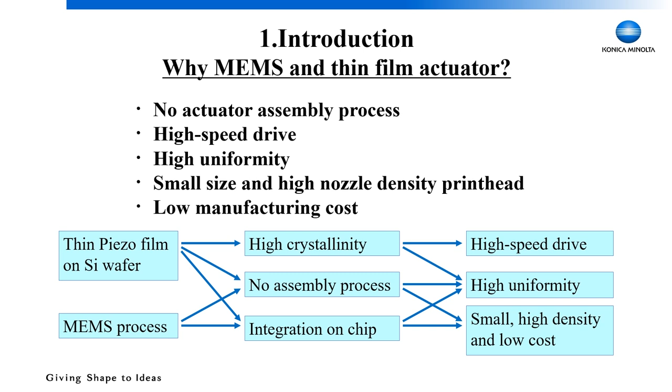Small size means we have more space in the actuator plate, so we can add some new functions like ink circulation. This is the purpose of this work.

High quality inkjet printer requires jetting properties like: high jetting frequency around 100 kHz, small droplet size around 2 picoliter, and the ability to use high viscosity ink around 10 millipascal sec. We tried to establish a method to design thin film MEMS heads by building a simulation model and manufacturing prototype thin film MEMS heads and verifying the observed properties and calculated ones.

Okay, next part is simulation method. In this section, I'd like to explain our simulation model. Piezoelectric inkjet head is generally divided into two parts: actuator part and ink flow channel part. These parts are combined with each other when the printhead ejects a droplet. Then coupled analysis is needed.

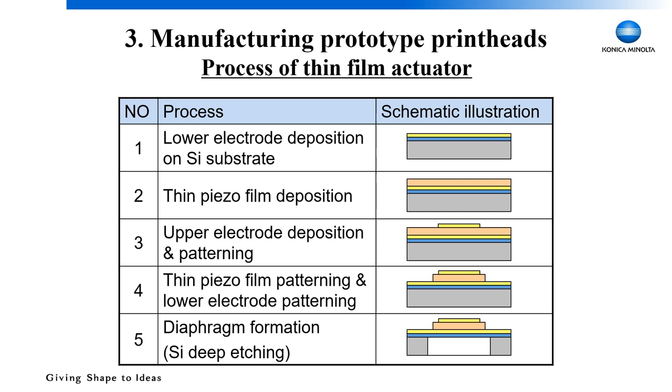This is the fundamental waveform we applied for our experiment. We applied pull push drive. At first, application of voltage V1 contracts and deforms the actuator. And next part pulls the actuator and ink is introduced. And then final part pushes the actuator and ink is ejected from the nozzle.

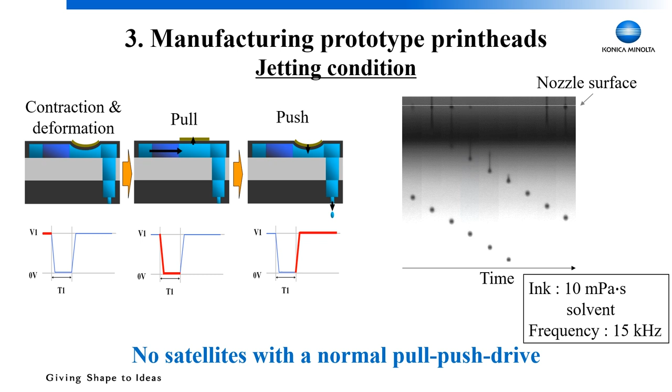Next, to investigate the specific actuator properties, we observed the actuator oscillation properties by laser Doppler vibrometer. This is the observation model, and we use glass plate as top cover of the prototype head, and that enabled us to observe the actuator oscillation during the printhead jetting the droplet.

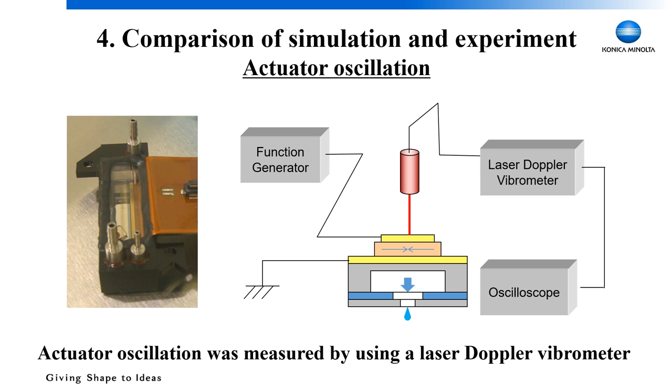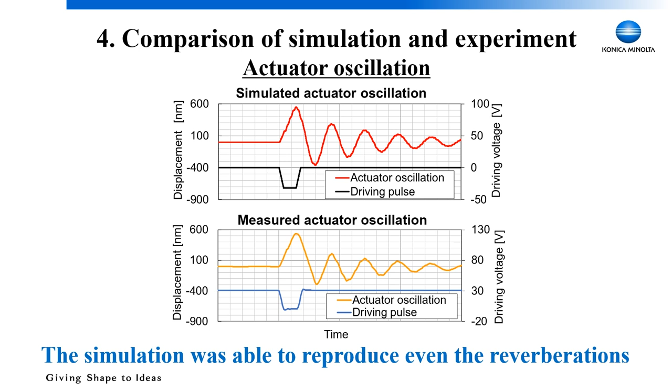Then we used this measurement to optimize the driving waveform. These reverberations interrupt the next jetting pulse when we use the printhead with high frequency. For example, if we use frequency higher than 50 kHz, the next jetting pulse will come around this timing. Then we need to eliminate the reverberations.

We applied cancel pulse to eliminate the reverberation in this timing. We optimized the cancel pulse shape and timing to eliminate the reverberation by observing the actuator oscillation directly.

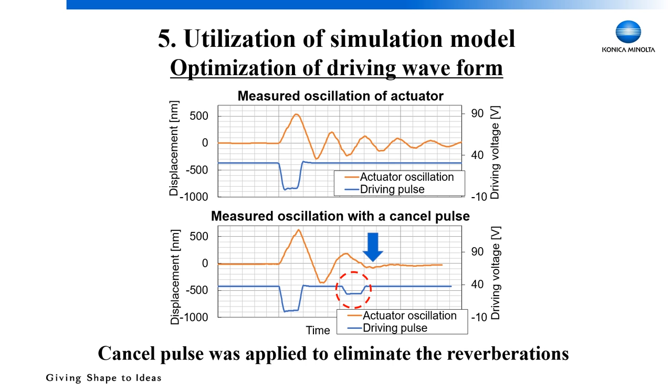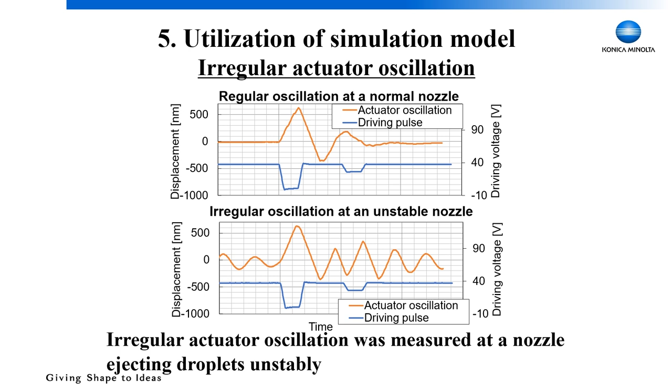The oscillation shape itself wasn't changed from the original one, but the frequency became shorter. We think we can apply this kind of technology to detect a missing nozzle.

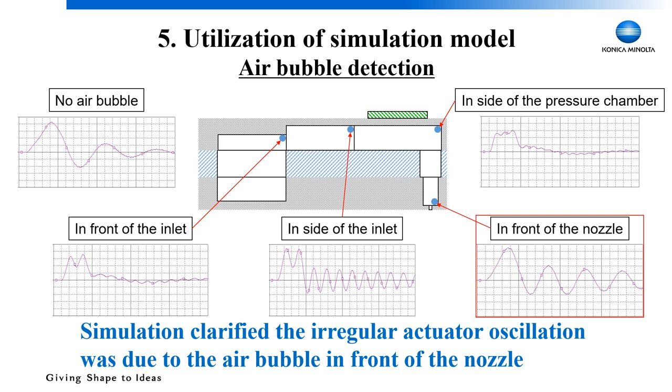This is the conclusion. We confirmed suitability of equivalent circuit model simulation, possibility of high-speed and high-resolution inkjet printhead, and usefulness of our simulation model for analysis. We succeeded in producing a new inkjet printhead with MEMS technology and thin film actuator by designing the printhead with our simulation method.

In the future, we will develop a novel MEMS head with high nozzle density and additional functions by arranging thin film actuators two-dimensionally. This is the end of my presentation. Thank you very much.

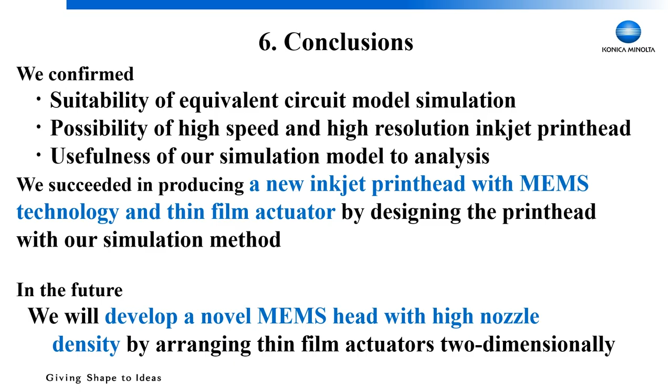Mawatari-san, thank you for your presentation. I have a couple of questions. You're running this simulation. Am I correct that you are thinking about a MEMS implementation in bend mode, so you're going away from the shear mode and moving to a bend mode implementation? Yes, this is bend mode, so we applied bend mode simulation.

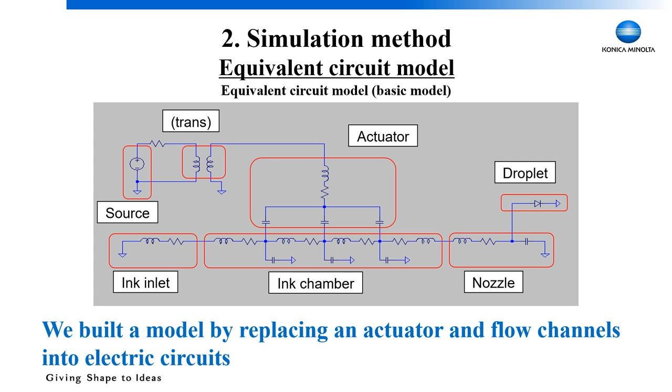Excuse me, what do you mean? No, I was just trying to confirm for the audience that this is a bend mode implementation. Yes, this is bend mode. Formerly you had, let's say, shear mode, just like Xaar had, and now you're moving into a bend mode implementation for MEMS. Yeah, that's right.

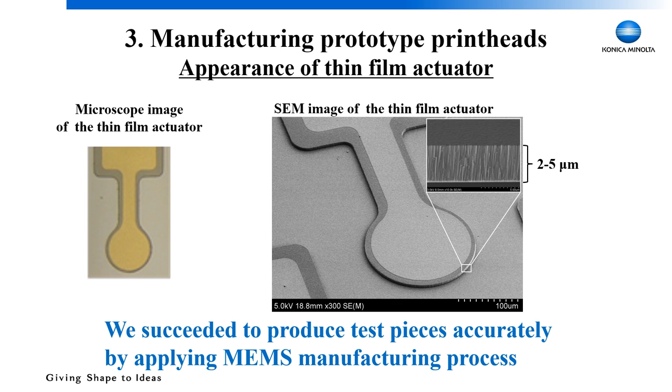When you talk about higher nozzle density, what kind of density are you thinking of? Is that 1200? Our current model, first generation MEMS head, already has 1200 NPI, but it has only 1024 nozzles. So physical nozzle 1000, increase that, 1200 then times 600? We are considering about that now.

We are also always looking - you've run the simulation model with, let's say, solvent-based ink. What's the final ink going to be here? Finally, we have to test all kinds of inks with our prototype head. But for water-based? Yes, I think we can also use water-based ink because our first MEMS head can use aqueous ink, which means water-based ink. Water-based ink, UV ink? Yes. Okay, basically we're talking here about manufacturing process.

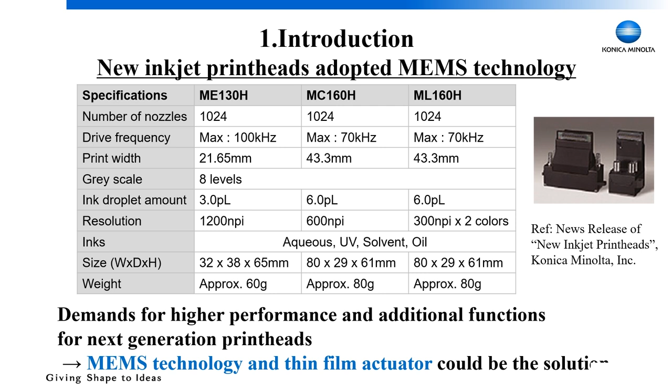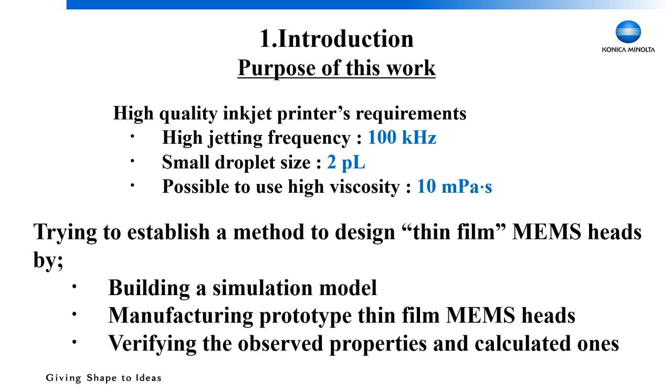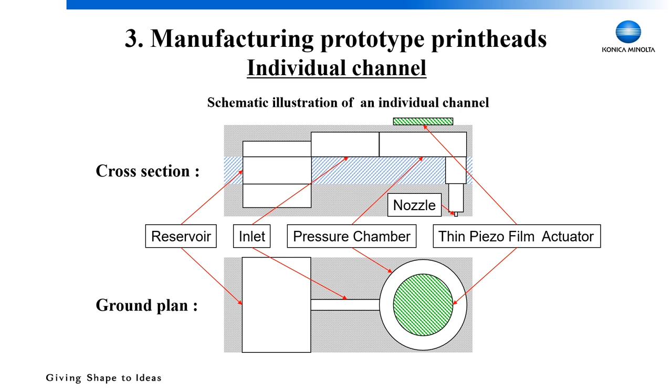Another question on the drop volume. You showed us 1 picoliter, 2 picoliters, 3, 6 picoliter. Will this be one version, let's say 6 picoliter with multiple levels, or just a single upfront chosen picoliter size? In this presentation, I showed just one droplet size, one droplet for 3 picoliter or 6 picoliter. So we can use grayscale and increase the droplet size from this base. For example, for this model, for this type, the 1DPD is 3 picoliter, so you can use grayscale and increase the droplet size.

Will the new head be announced at Drupa then, 2016? Well, launched? I'm not sure. You're not sure yet, okay.

Are there any questions from the audience?

Thank you. Have you done simulations about the life of the printhead, the life of one nozzle? In this equivalent circuit model, it's difficult to simulate the lifetime. So we use the manufactured prototype head to analyze the lifetime of the actuator. And we confirmed, I think, let's say, 10 billion shots - after 10 billion shots, the velocity change was less than 10%. So I think it's okay.

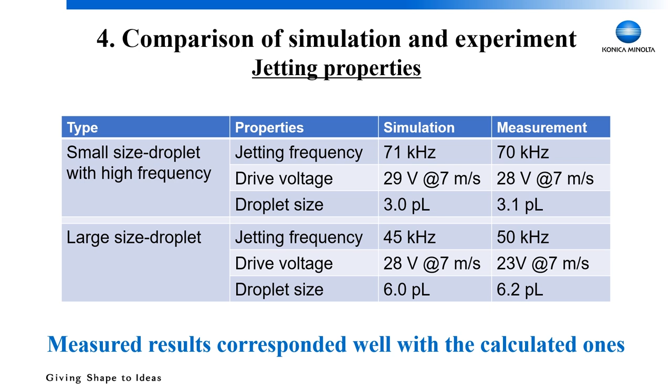Yes, another question? Okay, thank you. I think my question is also related because I noticed the driving voltage is pretty high, 29 volts. Does this mean the life is short? That's due to the modeling of the prototype head. We used the same parts and only changed these parts. So the driving voltage is not optimized for this study.